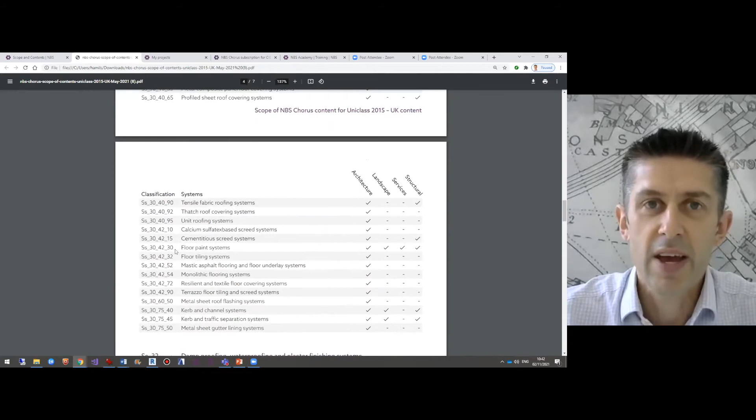So like civil structural engineering, earthworks, structural systems, a whole host of systems there for architecture, but just coming down to the classifications relevant for building services engineering. You see we've got systems for disposal, piped supply, heating, cooling, refrigeration systems, ventilation and air conditioning, electrical systems, communications, security, safety, control and protection, and transport.

And what we'll do in the demonstration today is show how to add some of these templates in, configure them and make them project specific. So that's a little overview of the scope of content, but let's jump across to Chorus itself. It's a cloud-based platform, and when you log in, you come into your projects dashboard where you can see the projects that you're working on. You can set up projects just by clicking the Create Project button.

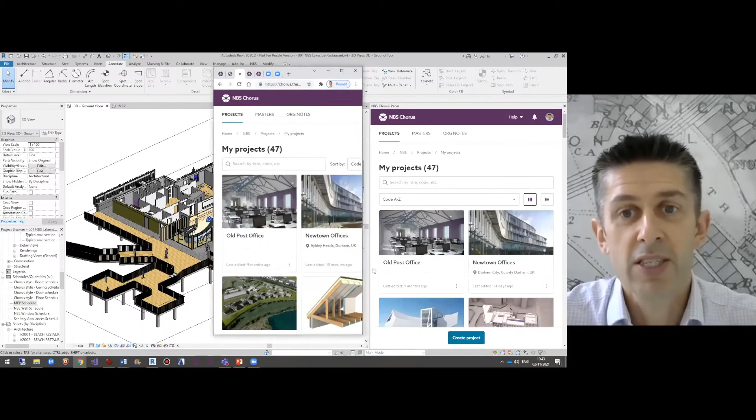And because it's in the cloud, it works through any of the latest web browsers, either on a PC or a Mac, or even if you're doing things like site visits. As long as you've got a 3G, 4G connection, it works great on a handheld device like a phone, and also iPad devices as well. So what I'm going to do is just jump into this project here, Newtown, a fictitious office project.

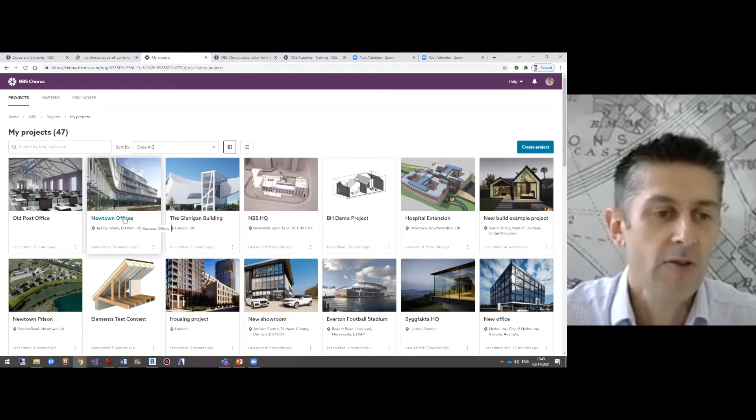Once you've set up the project, you get a bit of metadata, like what is the project, it's an office, what stage of the project is it at, whereabouts is it. Then you can come in and create specifications and also control who in your organization and maybe external consultants can access this project. And you can give them the permissions that are appropriate for that particular project. Are they an admin? Can they contribute? Are they a reader? That's similar to using Dropbox or Google Drive.

But to create a specification, you click the button here and give the specification a name. So I'll just call it Building Services Specification, and you choose the NBS content set. So we're going to go from the Uniclass 2015 classification, the work section library.

And then once you've created your specification, you then add the content that's relevant to that project. So what we'll do is we'll add a heating system and maybe a detection system as well, just to demonstrate how to specify using NBS Chorus.

So I search for heating system here. You see we have templates for all different types of heating systems. So electric systems, solar systems, got heat pump systems, etc. And as you click on each template, you get guidance that synchronizes on the right-hand side.

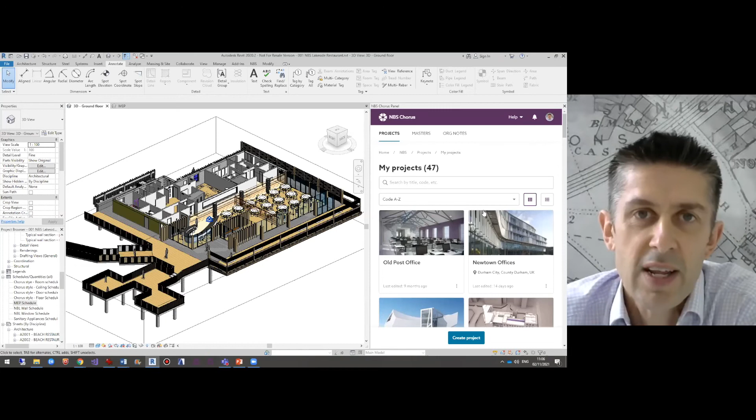I'd like to finish by showing how it integrates with the 3D model in the wider BIM environment. If I jump across to Autodesk Revit here, you see we have a plugin for Revit. What you can do is link the project and then link the objects within that Revit project with the equivalent items in the specification. If we have a little look here, we've got this Revit model linked to this specification, and this Revit model has its architecture and building services linked as well.

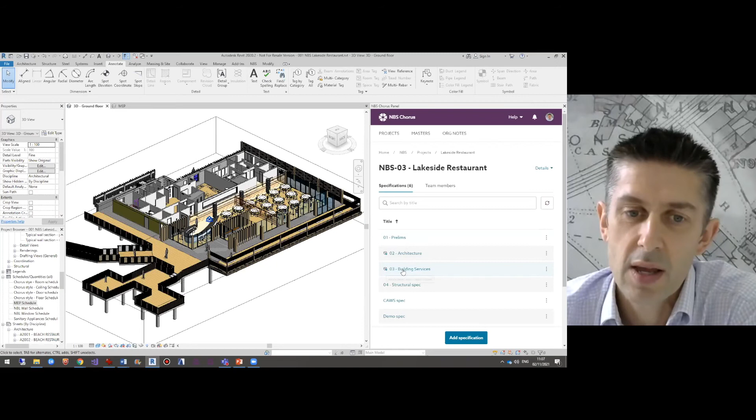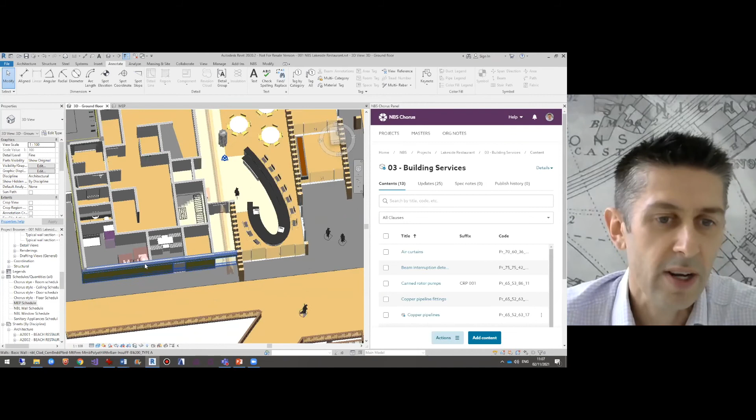That means that if I open this up, I can pick any object in the Revit model and link it to the equivalent specification. Inside this model we've got a bit of a plant room at the back, some transformer and boiler, etc. Let's have a little look at how this works. I can click on any of the items here in Revit. We've got a boiler here, then come across to the specification, click these three dots and say associate with model.

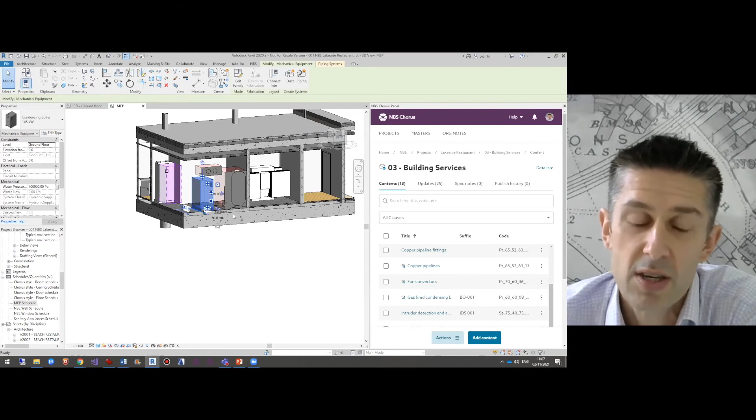And what that's going to do there is just stamp the classification codes and suffixes into the Revit file itself. So if we look at this RFA file now, you'll see there's a little set of NBS parameters that get sort of pushed in with the GUIDs. So I'm going to link up three of these objects and then just show how to do annotations and maybe scheduling, etc. So what we've got there is a pump as well.

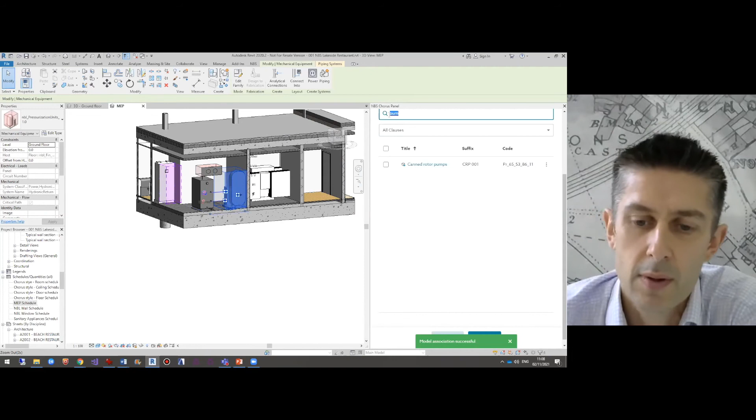So I find the pump. If you've got a whole list of things here, you can just use the search. Click the three dots, associate the pump with the specification clause for the pump. And I'll do the same thing here with what we've got, say that's the pressurization unit. So now we've got the boiler, the pump, and the pressurization units designed in the Revit model, but also linked to in the spec.

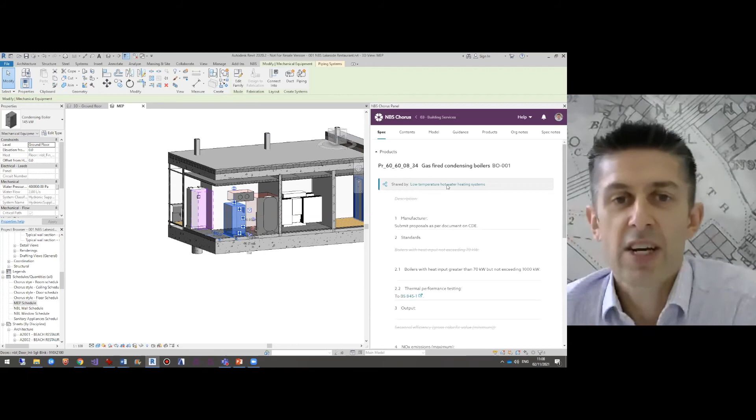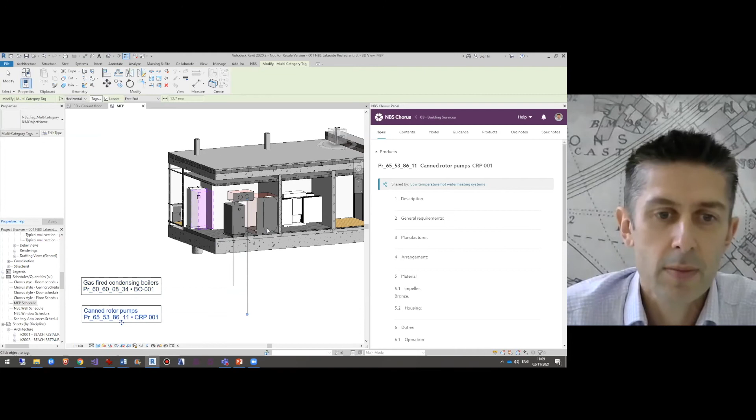And that means the next time you click on any of these items, the specification actually comes up on the right-hand side. So providing that you've got the right permissions, you can work on the specification, add new items to the specification at the same time as you do your design. And you can also come and do your annotations here as well. So if I drop down now, I've set up all of these annotations just to use those NBS parameters. So you're going to be improving the accuracy here and just standardizing the way that all of these cross references work.

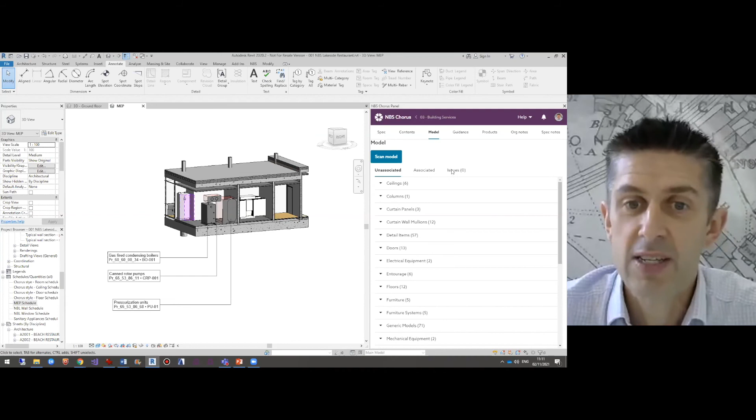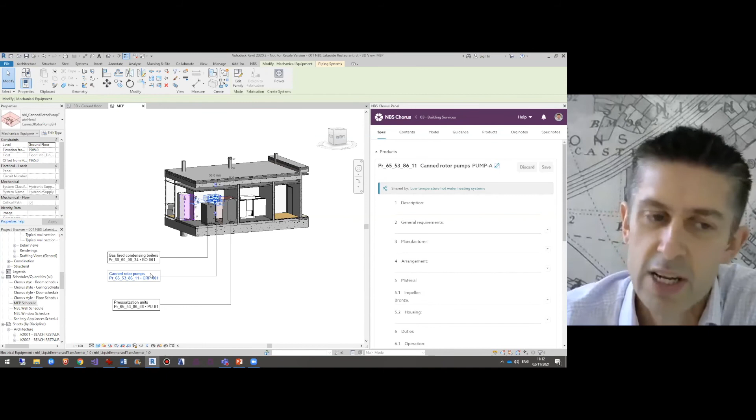So the last thing I'd like to demonstrate here is the model button. When you click the model button, it'll show you what hasn't been linked, what has been linked, and if there's any issues. So I'm deliberately going to create an issue here. I'm going to click on the pumps and just change the suffix here, and I'll just call it pump A. So by doing this, the specification's now out of sync with potentially tens of drawings and schedules.

If I jump across to the model button, you'll see that NBS has now flagged this as something that's out of sync. And if you watch what happens to the canned rotor pump, the CRP001, when I click fix all, it changes to pump A, and you're bringing the information in the model synchronized with the specification.

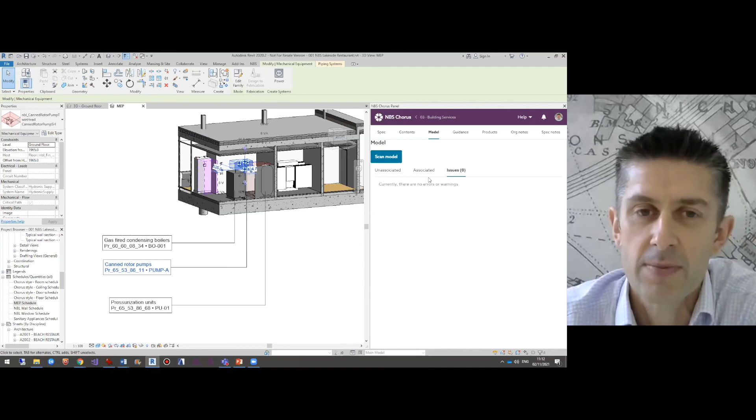Okay, we'll finish off the webinar today by looking at some customer stories, some case studies. So jumping back to our website, if you come to the resources area and look at case studies, you see a whole host of case studies here from project managers, architects, structural engineers, and also building services engineers. So you can click on any of these and read how they're using Chorus. One here from Adler and Allen, building service engineering, and one here from Hydrock as well. And they'll do a similar demonstration of what I've done, but from a real live project that they've been working on.

What we're going to do now is just play a short video that we recorded earlier this year from the Director of Building Performance Engineering at Hydrock, Anuran Wickramasinghe. So over to you, Anuran.

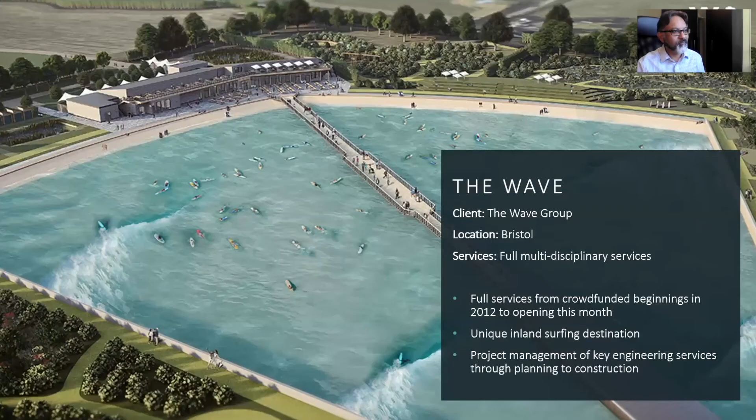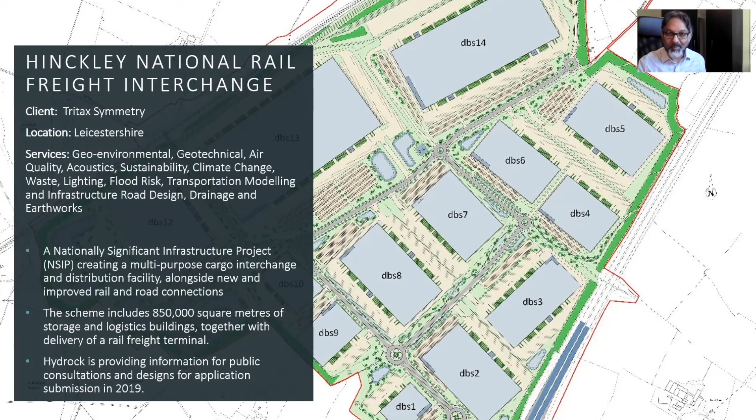Many of us, over 90% of us, are now working from home, and the online platform has been excellent for us. We've been able to work from our homes. We connect up. We don't have to clog up our server because it's a web-based type arrangement. And also being a multidiscipline office, the structural engineers and the MEP engineers all using the same product means that it looks consistent throughout. And the same goes with our other partners in the engineering process, such as the other professionals, the architects and the like, who also are using NBS.

The other thing that's quite useful for us is this simultaneous working from the different offices, so that there might be an electrical engineer in one office and maybe a mechanical engineer in another. And now we don't have to be sharing files and the like. The online platform helps us work together.